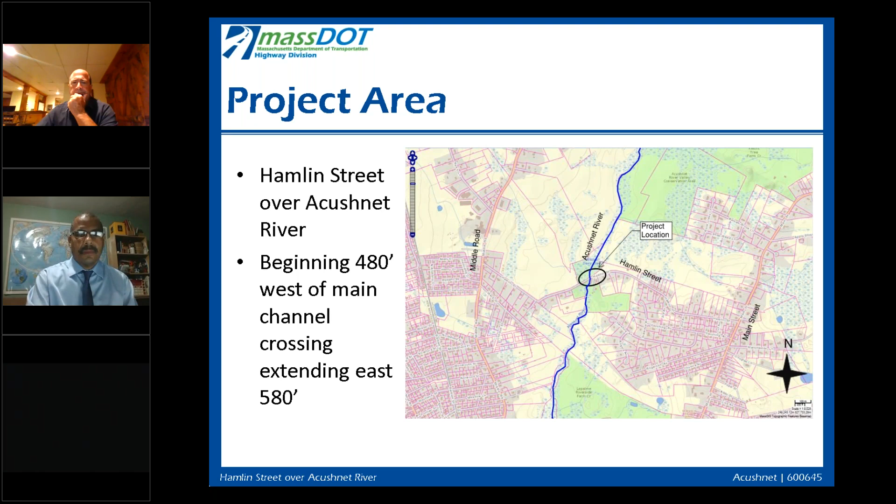Hamlin Street is a local roadway that extends from Middle Road easterly to Main Street. Up until the mid-1980s, the area north of the roadway was known as Hamlin Pond. The shallow pond was retained by pre-existing weir structures that have since been removed. Development along Hamlin Street is suburban and residential. This project is needed to address existing structure and site issues.

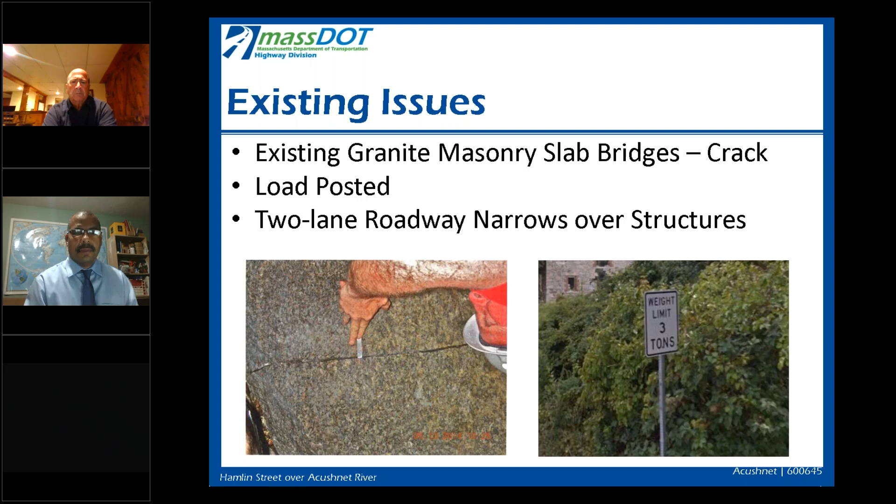The issues include the existing structures are granite masonry slab spans from the 19th century. That Hamlin Street is a narrow 2-lane roadway without shoulders, generally 20 feet wide, edge of pavement to edge of pavement. The travelway width over the existing bridges is narrower than that and does not meet current standards.

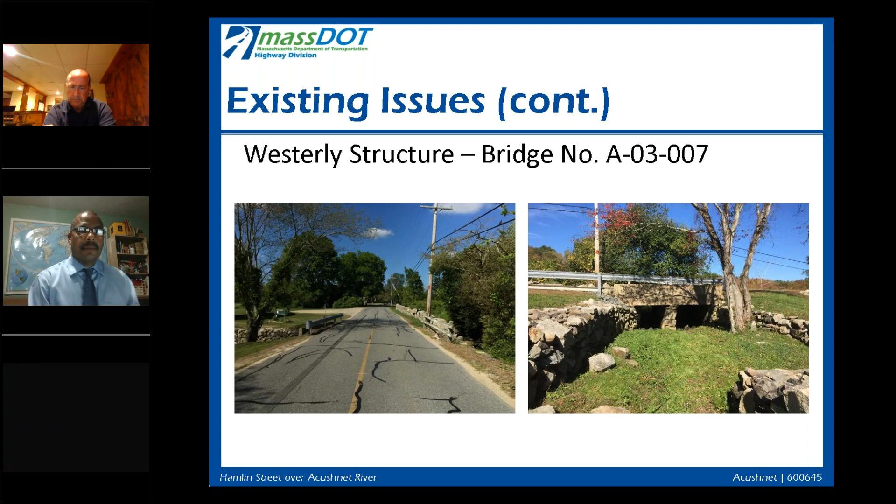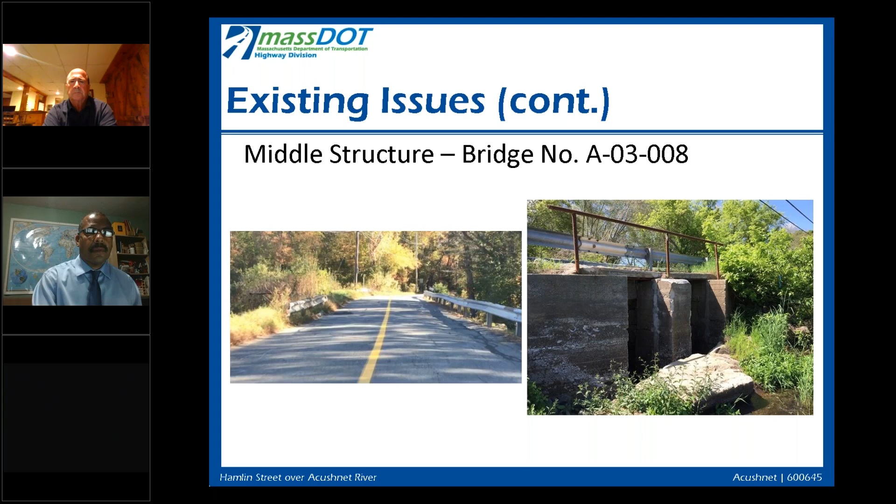The westerly structure is above the design discharge flood elevation, but will help to provide and convey downstream flows above the discharge design elevation. At higher river discharges, the middle structure does convey overbank flow, and stones stacked at the entrance act as a weir and regulate downstream conveyance.

There's a crack in one of the slab stones of the easterly bridge. This results in the bridge being load posted for just 3 tons, meaning the legal loads are restricted. For comparison, a modern design load is 36 tons.

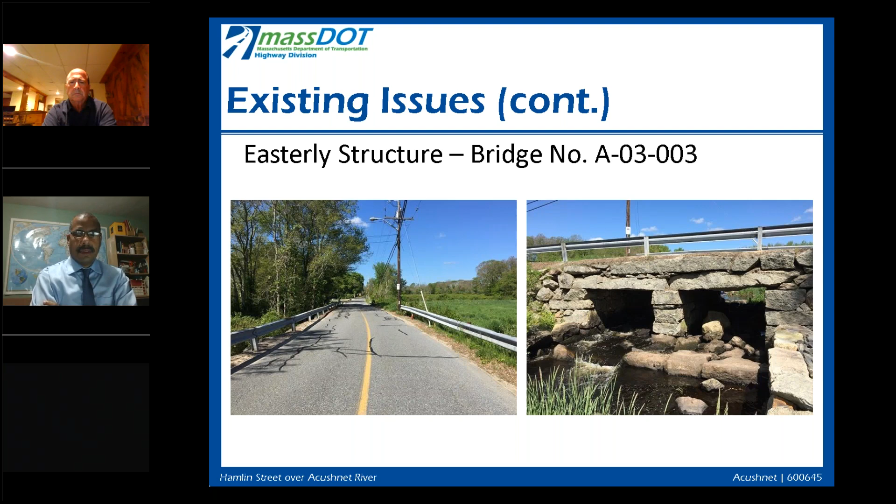The surrounding area includes several significant site constraints. A historic site, White's Factory, abuts the southwest corner of the project. Public lands are located along the north side of the roadway and at the southeast approach corner. Extensive wetlands are located beyond the existing roadway embankment on both sides. A private drive entrance is located at the southeast approach corner of the project, and a small parking area with access to the river is located at the northeast approach corner.

Goals for this project include determining the size and location of structures needed for hydraulic conveyance, providing a crossing that meets current load capacity standards, increasing the travelway width over the crossing, minimizing traffic disruption during construction, and minimizing impacts to environmental resources and adjacent properties.

The scope of the project then includes removing and replacing the existing bridge structures, reconstructing approximately 530 feet of approach roadway near the existing alignment, widening the paved roadway and constructing retaining walls to minimize side slope impacts, and maintaining the appearance of the existing stone retaining walls along the south side of the road.

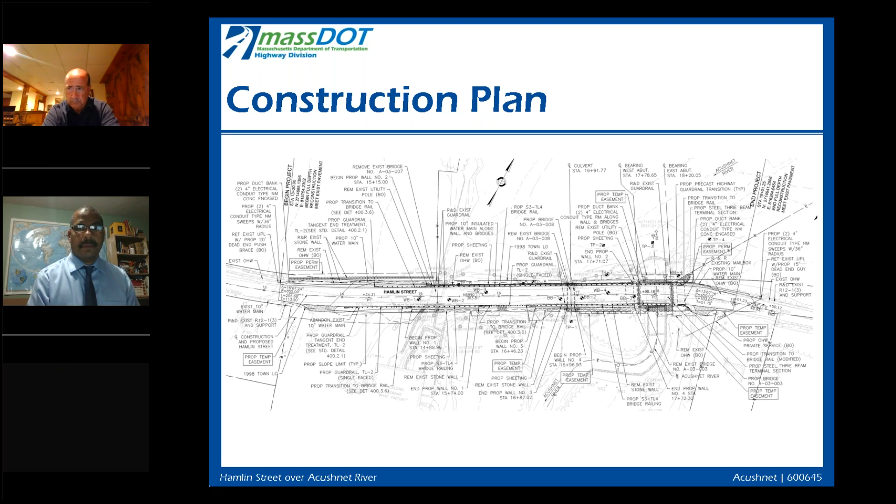The 75% design for this project was completed in June of 2020. The current project milestone is this design public hearing. The bridge construction is anticipated to begin in the spring of 2022.

An important public concern is always the impact to traffic during construction. For this project, a temporary roadway detour is planned. The road will be closed and the detour will be established via Middle Road to Belleville Ave to Main Street. A road closure duration of 16 months is estimated.

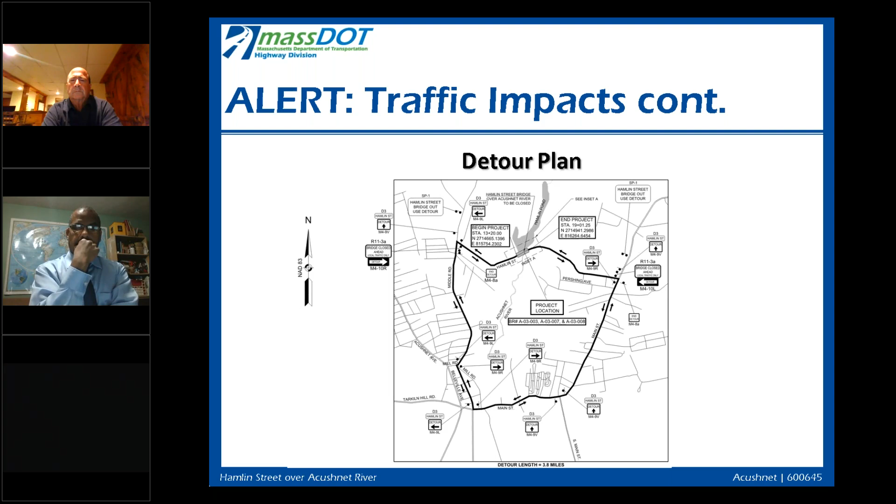The proposed project improvements include the replacement of the easterly bridge with a 42-foot span precast concrete deck beam bridge, the replacement of the middle bridge with an 8-foot span precast concrete box culvert, the removal of the westerly bridge, construction of two 10-foot travel lanes with 2-foot shoulders,

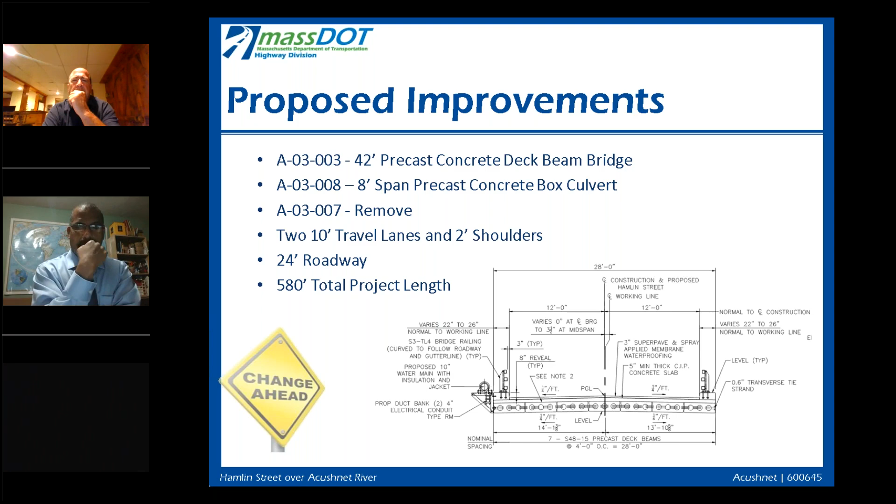and the image shown on this slide is a cross-section of the proposed easterly bridge. This would be a view sliced through the structure perpendicular to the roadway. The replacement structures meet current load capacity standards. Design features such as the proposed roadway width and the use of retaining walls minimize resource impacts.

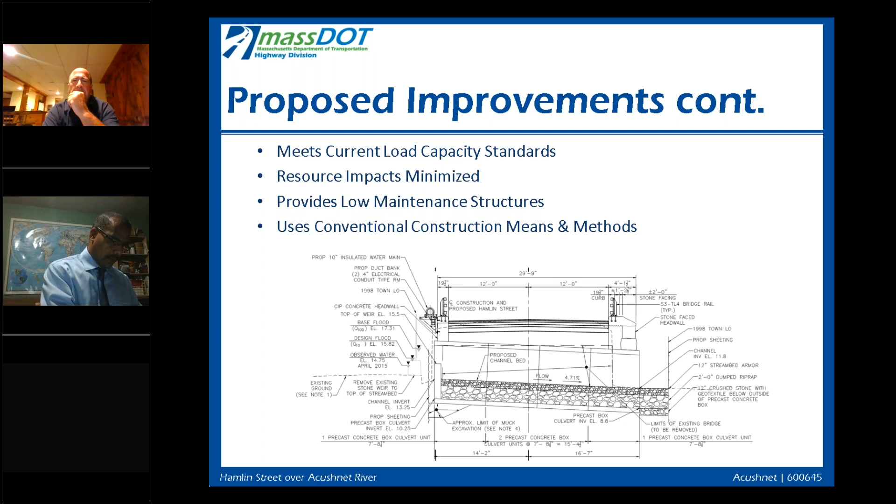The image shown here is a cross-section of the proposed middle bridge. This again is a view sliced through the structure perpendicular to the roadway. The project will widen the travelway to 24 feet. This image shows a typical cross-section of the proposed roadway between bridges, showing the retaining walls on both sides of the roadway. This again is a view sliced through the embankment perpendicular to the roadway.

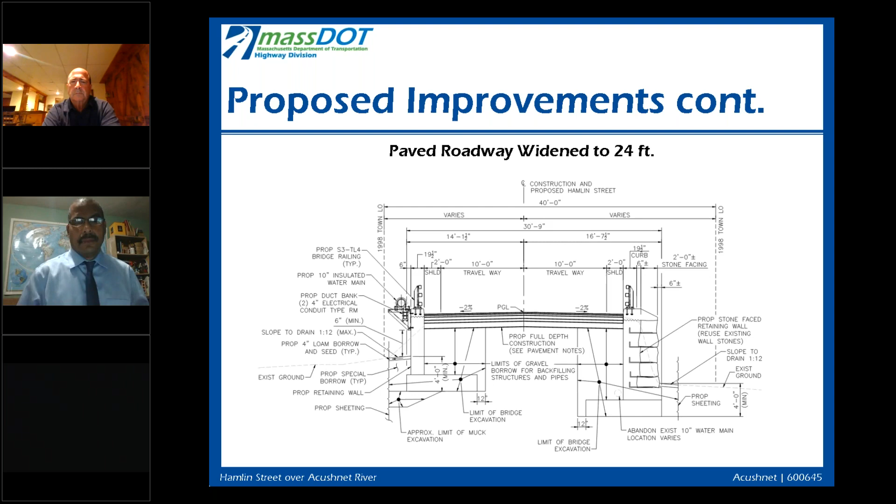The proposed improvements provide replacement bridges that satisfy the hydraulic need, a crossing that meets all legal load standards, minimized impacts to wetlands and abutters, and minimized traffic disruption during construction.

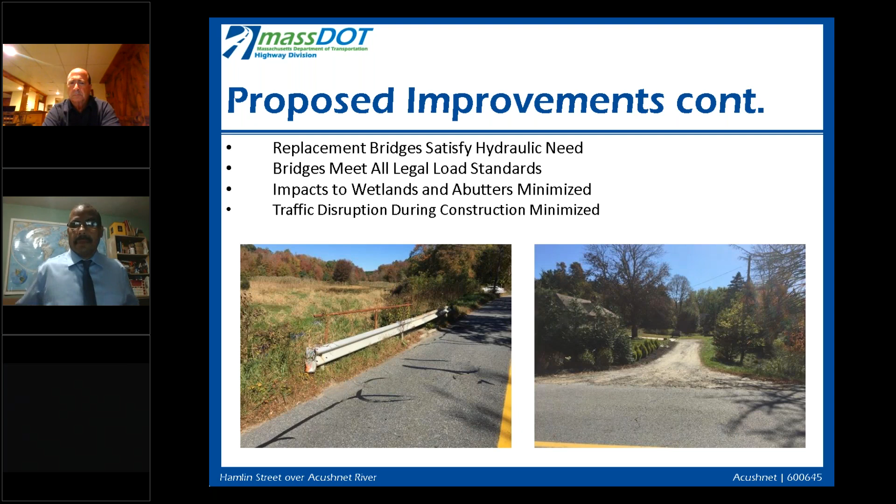The Massachusetts Environmental Policy Act Office, as well as the National Environmental Policy Act Office and the U.S. Army Corps of Engineers, have environmental permitting oversight on this project. A MassDEP Section 401 water quality certification will be required. This provides water quality protection for the river. And a U.S. Army Corps Section 404 permit that deals with dredge and fill materials in waterways will also be required. The project must meet requirements of the Massachusetts Wetlands Protection Act.

This concludes my presentation of the proposed project, and I will hand the discussion back over to MassDOT Project Manager Alwin Ramirez. Thank you, Rick, Mr. Hebert from T.Y. Lin International.

As stated previously, the purpose of this hearing is to solicit your input regarding this project. As the plans are not yet complete, we may not be able to answer all your questions or respond to all your comments at this time.

The last sheet of the handout is a mail-in sheet. If you have any questions or comments which you would like to submit in writing, you may use this sheet. You may mail it into the department within 10 days of this date, and it will become part of the official record. Also, follow the links on your screen to send us your comments or questions. Please remember to identify yourself by name and affiliation, whether you are an abutter, local official, or concerned citizen.